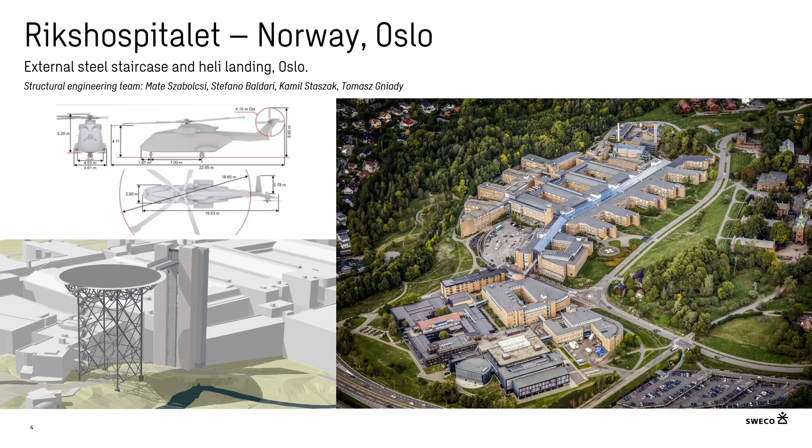Another interesting thing is that the most demanding part of the project was the road below, because we needed to check all of the columns in an accidental situation for a crash, and from the crash, of course, there can be fire. So we had fire engineers who prepared how high the fire and temperature would be, and the first 3 stories were fire painted, and above that we didn't need fire painting because the steel profiles themselves were enough.

There was a short presentation of how we quickly tried to match whether the Tekla drawings and sections were correct in relation to the FEM model, because there were a lot of iterations and we wanted to be sure that everything fits. The tower is steel, the substructure is reinforced concrete cast on site, and the staircases and slabs are made with filigree plates.

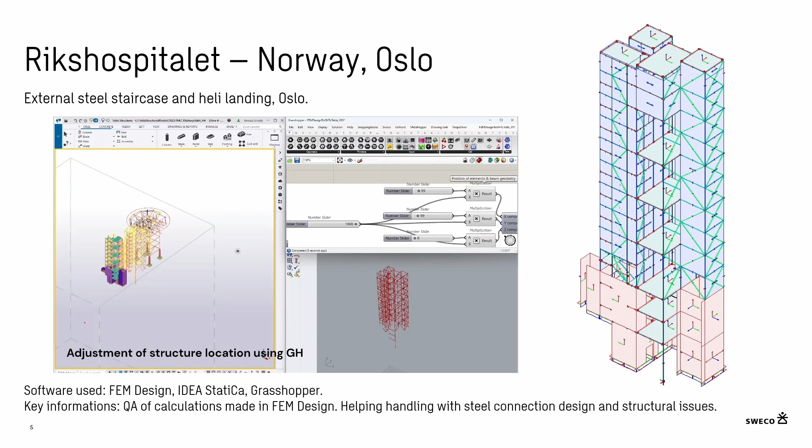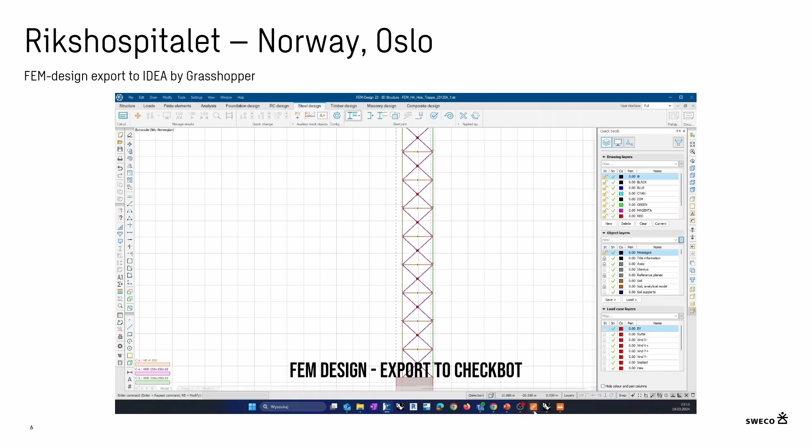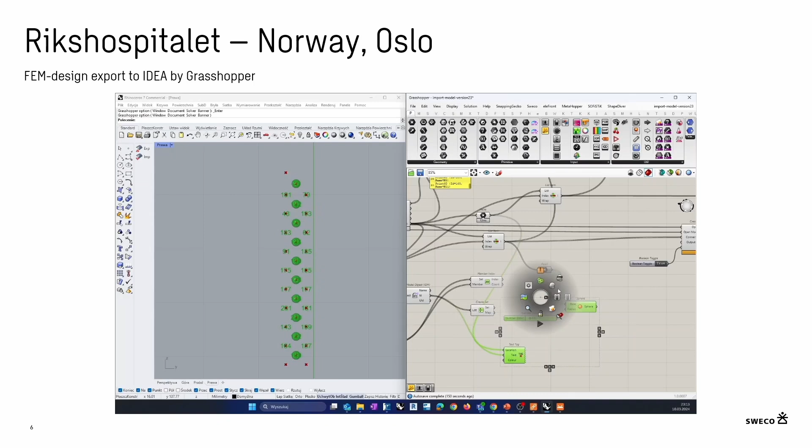Here is a quick presentation of one of the scripts we use to run background analysis for multiple connections in IDEA StatiCa. We print multiple reports to choose the most critical connection, and in this presentation I'm showing that we apply multiple templates of connections and welds to all of the selected nodes, and then we run the analysis in the background to check which one is the most critical.

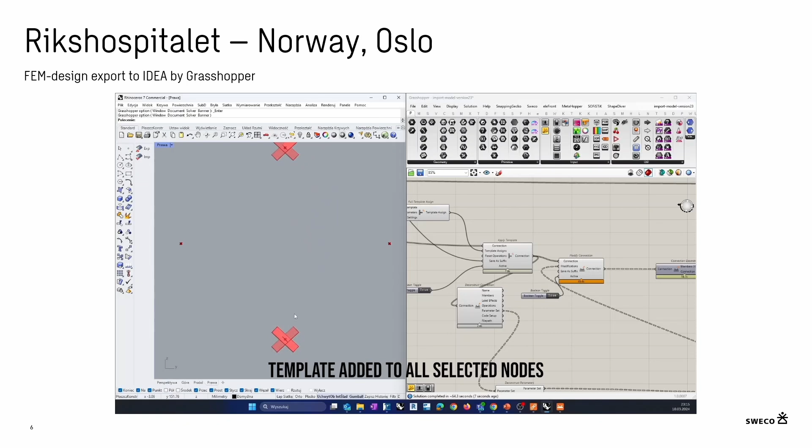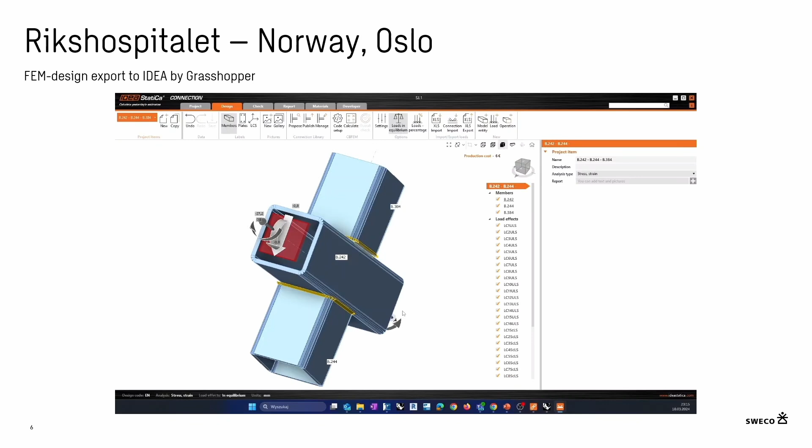And it's not a typical way of working in this project, because usually we would find the biggest force and check one connection, but in this project we just decided to check this workflow and how it works. And you can see that before there were no welds and no details in IDEA, and then all of the templates were assigned.

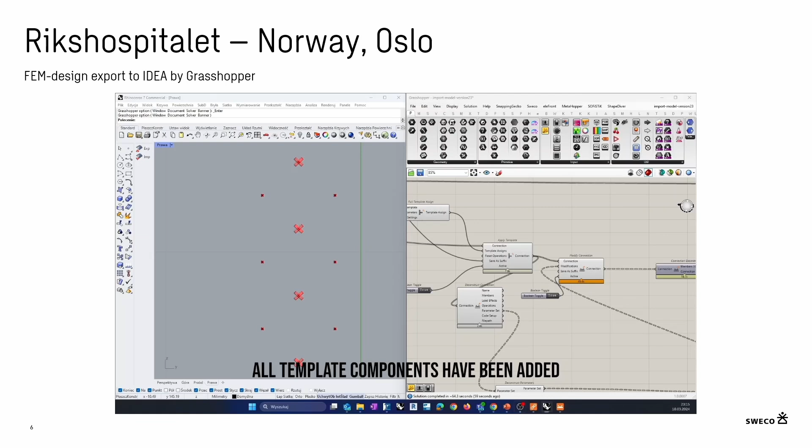The second project is from Aalborg. I wasn't involved in this project, so I only know what is in the presentation. This is a clubhouse and a restaurant with some underground part. It is next to the harbor, and the clubhouse was made for people who would like to surf or swim and want to go to the changing room.

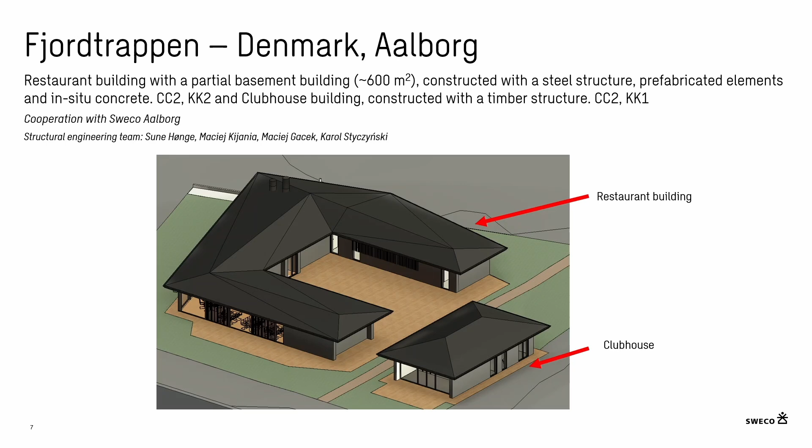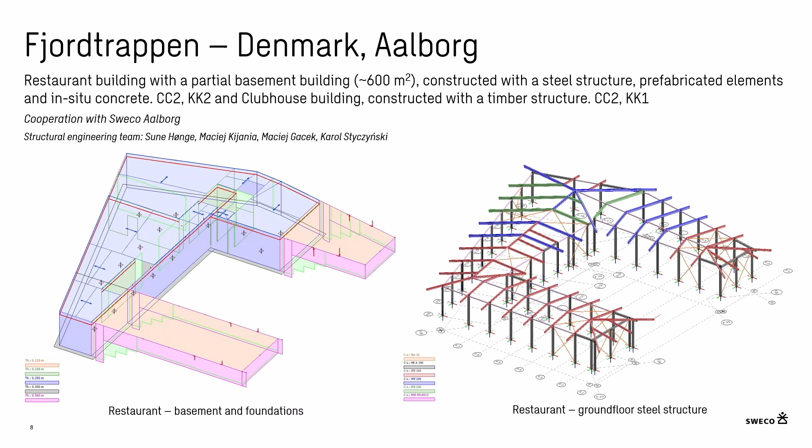In the project, the top part was steel, and the basement part was cast in place and precast elements. Slabs were hollow core elements. Typical for the Danish market, to analyze slabs and connections between slabs we use the stringer panel method, where Rene is an expert in SWECO. The stringers are just compression or tension elements, and the panels represent the hollow cores, where we check that the in-plane shear is not exceeded.

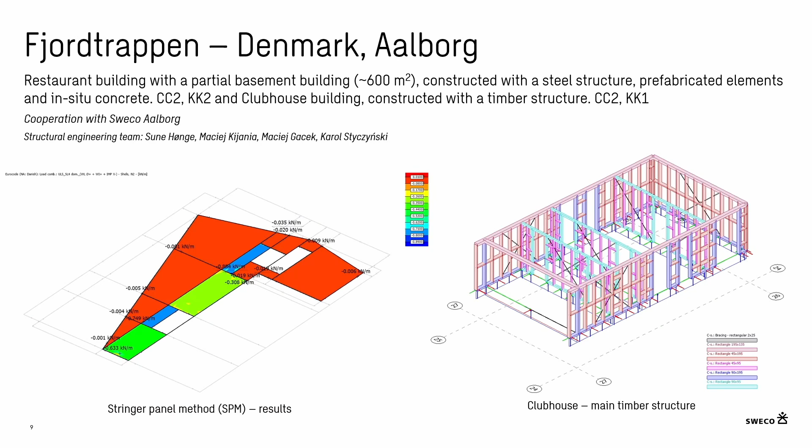What's interesting is it's next to the harbor, and also something non-typical for me was that for stability, the shear walls were post-tensioned vertically to add compression forces to meet the stability requirements.

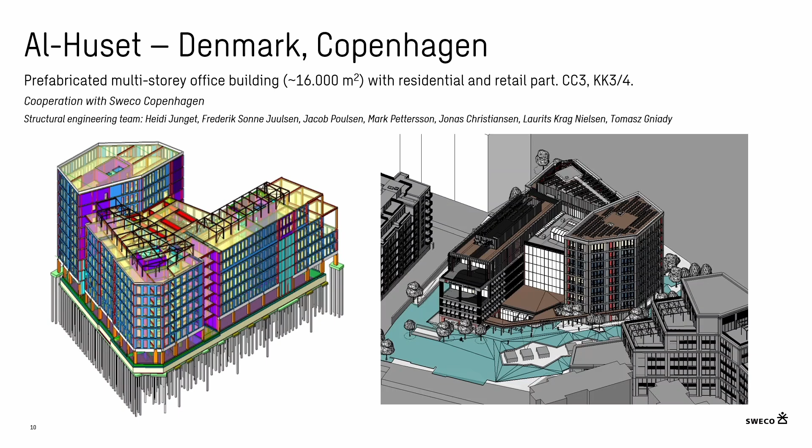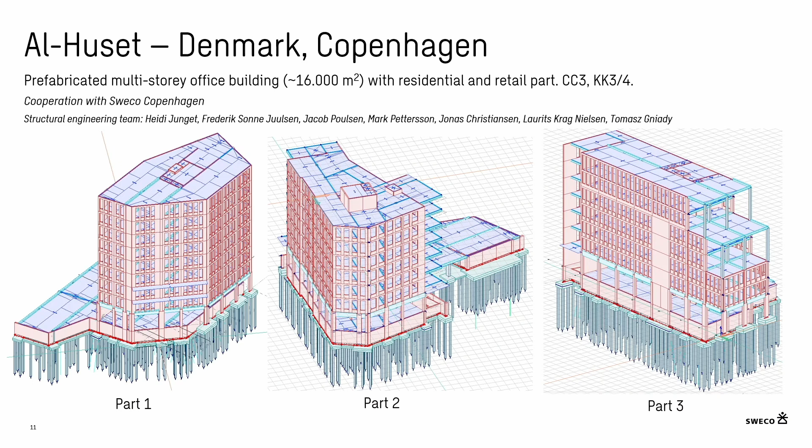The buildings were divided into 3 parts because we worked in a team. Each member had a part to work on. My part was 3, part 2 was done by Heidi and part 1 by Mark. I was also working on all of the foundation design in this project. And this is how it looks now, because it's already built and ready to use.

Yeah. Okay. Thank you. Okay.

My name is Jakub Jaworski, and I am a structural engineer in SWECO Poland from the Kraków office. I have quite the same experience in FEM-Design, about 3 years, but we began mostly on projects from Denmark, Copenhagen. I will explain a little bit. Maybe it looks a little bit weird that we are showing mostly projects from Denmark.

But in fact, in our office it is quite new software, and we would like to develop ourselves and switch to this software in the future, and hope that next time maybe we will come with some projects from the Polish market. I do not promise, but I hope that it will be like that.

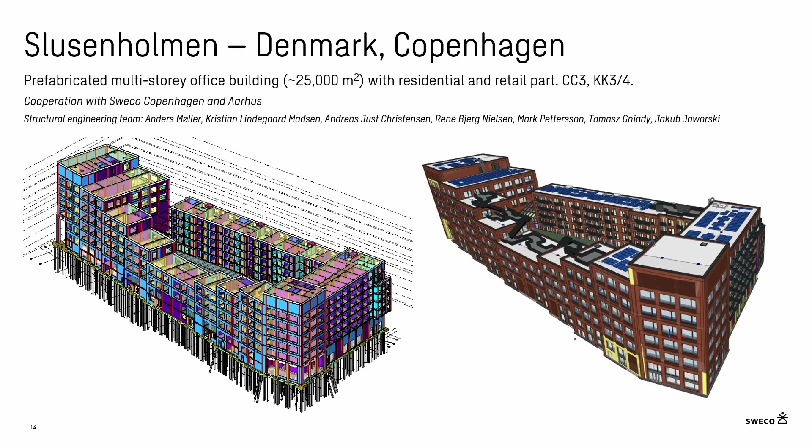So during my career in SWECO, I had the pleasure and occasion to work with SWECO Copenhagen and then Aarhus in cooperation, and I had an occasion to work in such a good team, Kristian and Rene. In fact, I was working on a really interesting building with some office and residential parts and some place for a supermarket, not in the basement but on the ground floor.

On this project, Tomasz and I were responsible mostly for taking care of the FEM-Design models, which means we had some models from the beginning, but we had to make a lot of changes, a lot of updates, remodeling, creating new loads, etc. We started from 2 separate models, and in the end we had four parts.

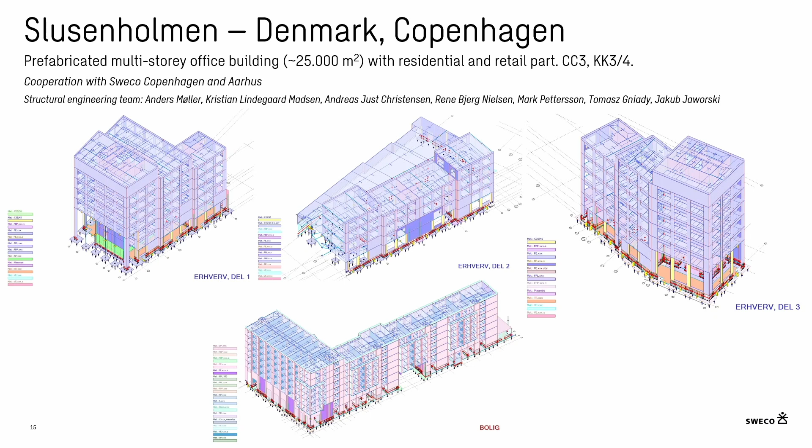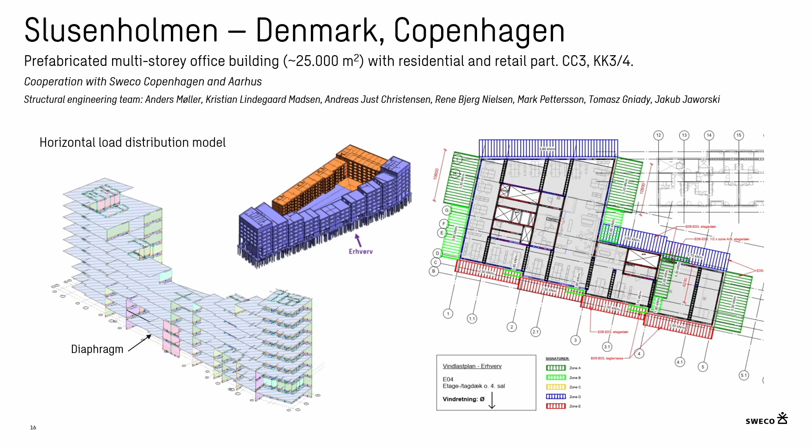Because it was a prefabricated building, we learned some know-how from SWECO Copenhagen on how to design and analyze a building like that. It's not easy, and you can't directly put loads on the prefab elements because they are released. So in parallel, you have to create models like a horizontal load distribution model, where we can use diaphragms to distribute horizontal forces. I don't want to go further because it's know-how of SWECO Copenhagen, so I will leave this case to them.

We also had some industrial facility buildings from Denmark. This project was a little bit confidential, but I have permission to show some details from my models in FEM-Design. At first look it's not a huge building, but it was really interesting because it was a mix of a prefab ground floor and a cast in situ basement.

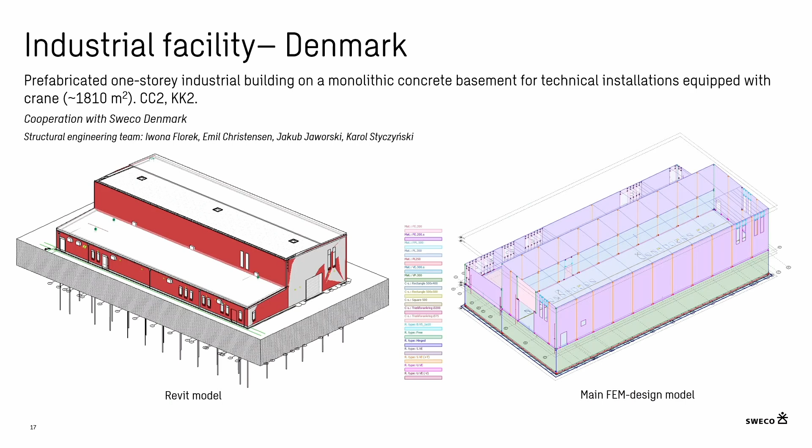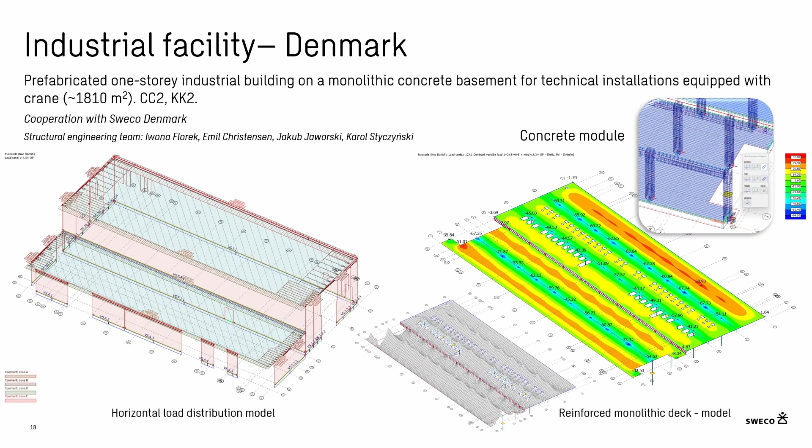We could use FEM-Design at first in the same way as on the Slusen project. So we could distribute horizontal loads for the prefabricated part, but we could also use the concrete model and design reinforcement. As you can see, there is a monolithic deck, and we could do it directly in FEM-Design in a really easy way.

And last point, in August we had a training course in FEM-Design by the StruSoft team from Poland. During 4 days we had a really large scope, because there were 12 engineers from SWECO Poland, but only maybe 3, or now 5, had some experience in FEM-Design before, so we had to make these courses from the beginning for beginners.

I don't want to go through the whole scope, but for me it was really interesting to go through the whole design modules. Finally we got certificates from StruSoft. After that we decided on some plans for the future. In fact, we would like to switch to FEM-Design as the primary structural software for concrete, precast, timber, and steel structures.

Even older designers had really good feedback after the courses, and they said they would like to change something; FEM is really good. Then we would like to create some standards in FEM-Design to make designing faster, and make calculation notes and templates. Actually, we've already started with that. That is something we already created. It is just the first step, let's say.

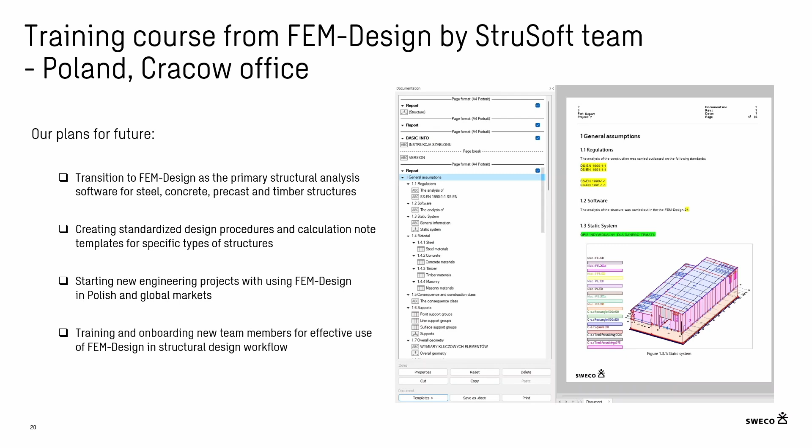If it's possible, we would like to start new engineering projects from scratch using an FEM-Design model, of course if the client agrees to cooperate. And last point, we would like to train and onboard new team members and colleagues to use FEM-Design effectively, and learn the workflow that we already learned from SWECO Copenhagen.

It was only a small step, but we would like to develop and increase our skills in FEM-Design. Here I would like to thank Jan Wrubel and Marek Krawczyk for their really excellent and professional approach during the courses. So thank you.